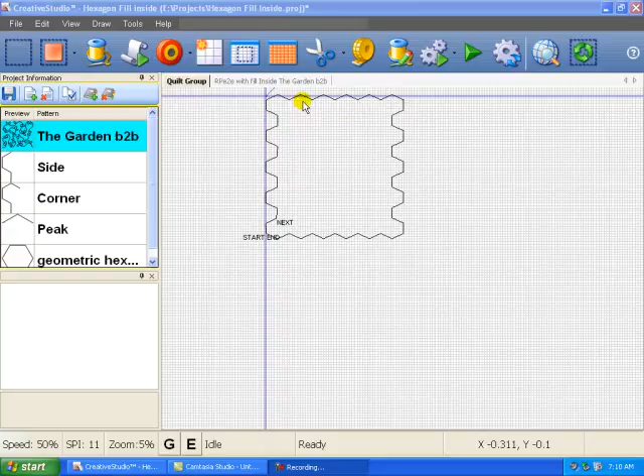So I decided I wanted to use an edge-to-edge pattern, but I wanted to be able to use fill inside, so I would not have tie-offs from using the trim. So this is the basic shape of this quilt. Now I used the geometric hexagon, and I took it all apart using divide pattern so I could use different sections to make this outline. I did this in SAM, and then I saved the project and brought it to the Statler, and I've actually stitched out part of this outline.

In this quilt group, repeat patterns edge to edge with fill inside, and this is the garden pattern, border to border by Anne Bright. So I like this pattern, and I'm going to quilt it on this quilt using fill inside on the edges. First thing I'm going to do is set up the pattern on the quilt.

So I go to repeat patterns, click on it, you can see all the height of this pattern is 12.12, the width is 14. Now all I need to do is put in the width of the quilt in this area and the length of the quilt in this area.

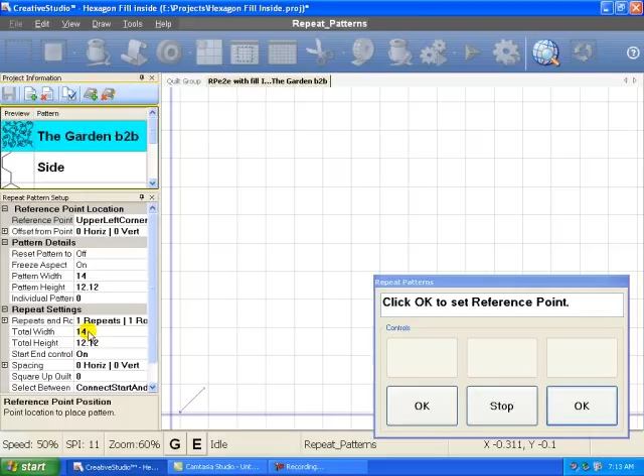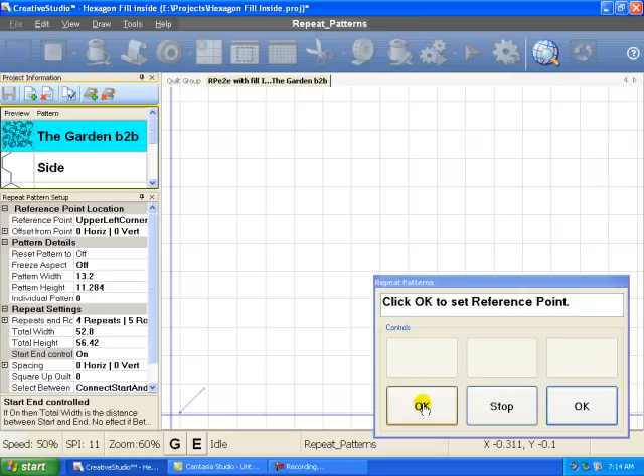The way I have this set up, the width is 52.8, and the length is 56.42. Okay, I got all the numbers in.

I clicked OK. Now the problem is this would just go from edge to edge, and I suppose that would be okay. I used the crosshairs on the left and on the right to check how this quilt was going to fit, and it looks like it's going to fit okay.

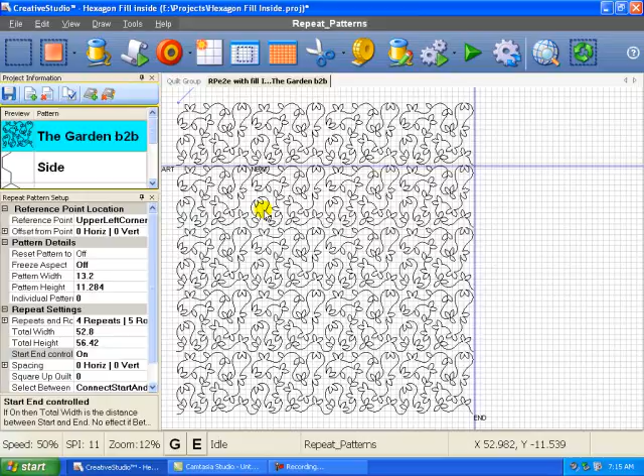But now remember, the sides are irregular, so I have to do something. I have the boundary clicked in, and it doesn't matter that this boundary comes down into the second row, because I'm only going to do fill on this first row.

So I'll select all the repeats in the first row. All the repeats in the first row are selected. Now I'll right click and go down and select fill inside.

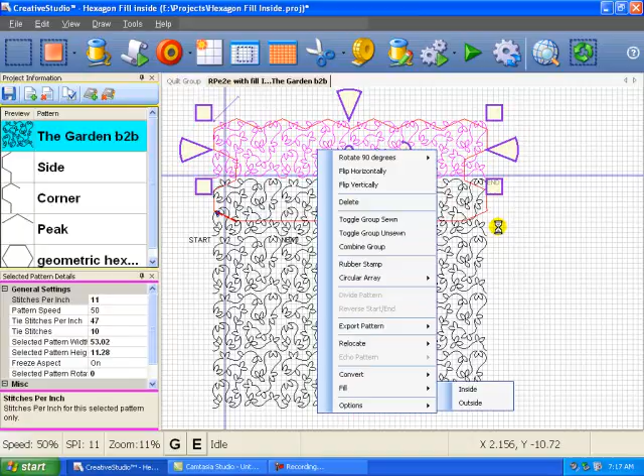Okay, Creative Studio has finished figuring all of these points, and it has trimmed off using inside fill all of these points that would be outside the edge of the quilt.

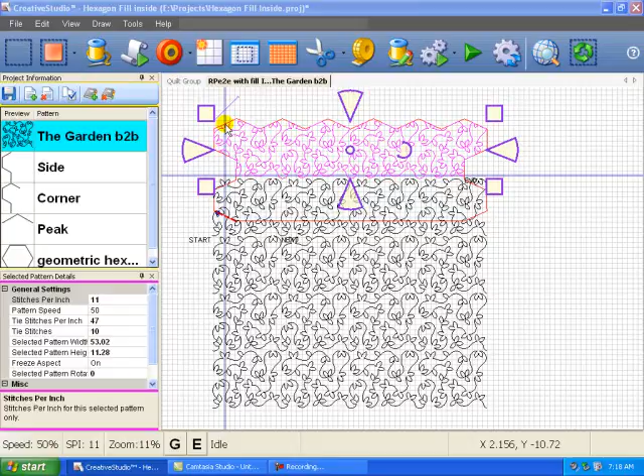Now I like this because this is going to start on this side, and it'll quilt. When it gets to the edge, it'll quilt along the boundary to the next point, and it'll continue to do that all the way up and across the top and down this side until it's finished with the row, and it will do tie off. One tie at the beginning, one tie at the end.

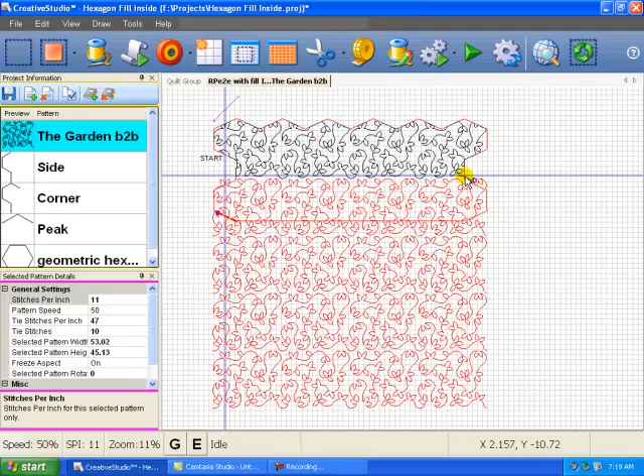I've toggled all the other rows as sewn just so that we can see where the start of this is. You can see it's going to start here, and the end of this row is here. Now I've toggled all those rows back as unsewn, and you can see it starts here, and we looked at the end of this row was here.

Then the start point of the next row is over here, but that's going to be off the edge of the quilt, so I'll have to, when I quilt this first row, I'll roll it, I'll make a new boundary outlining the area, and I'll do an inside fill and quilt the next row.

After I quilt row 1, you say, okay, how are you going to locate this project again? Because your original start point is gone and you can't reach this start point.

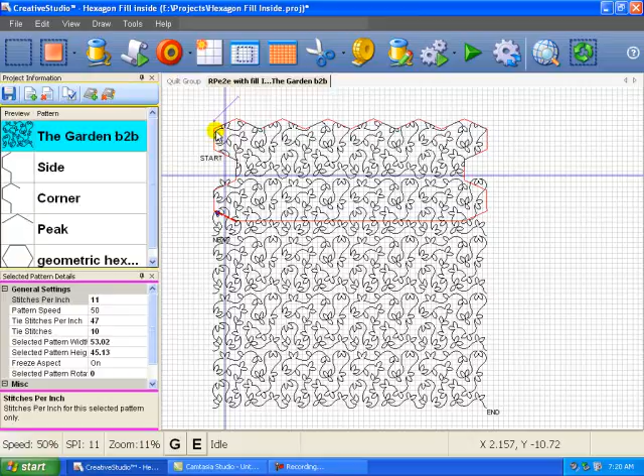I have quilted this row, rolled the quilt, and then I want to relocate. So how am I going to do that? Notice that along the bottom,

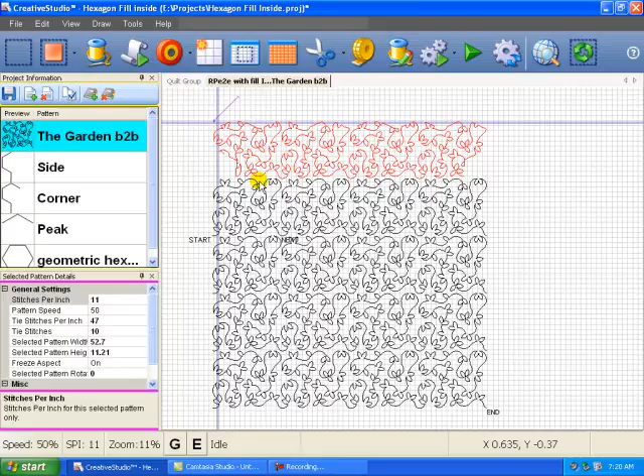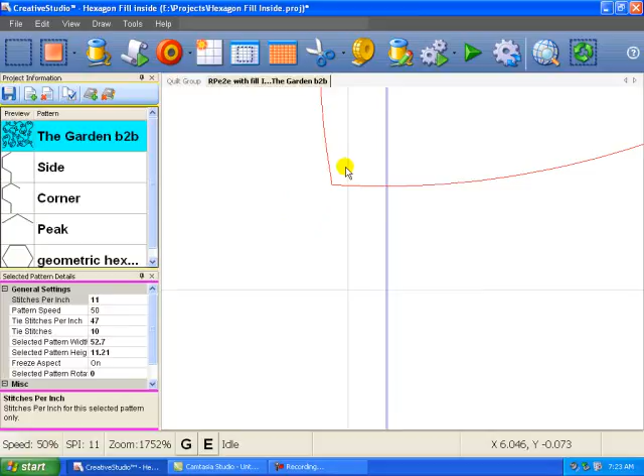this pattern has many points. I have rolled the quilt, and this point is way up next to the take-up roller. I zoom in, I right click, select relocate, shift all to one point, follow the instructions, says click on a known point on the CAD screen. This is my point. I click it.

Then it tells me to move the machine head to that point. I've done that. Click yes. Now it has relocated the entire quilt project around that one point. Now this is up next to the take-up roller.

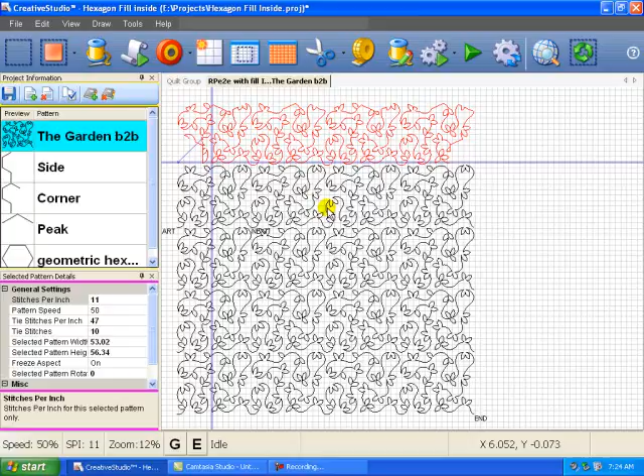So next thing I'll do is do another boundary, and then select the second row and do the inside fill, and I will continue to do that, and I will continue to use a sharp point

like right here, the point of this leaf. I'll continue to quilt and roll and use relocate, shift all to one point, make my boundary, use fill inside, and each row will have a tie at the beginning and a tie at the end.

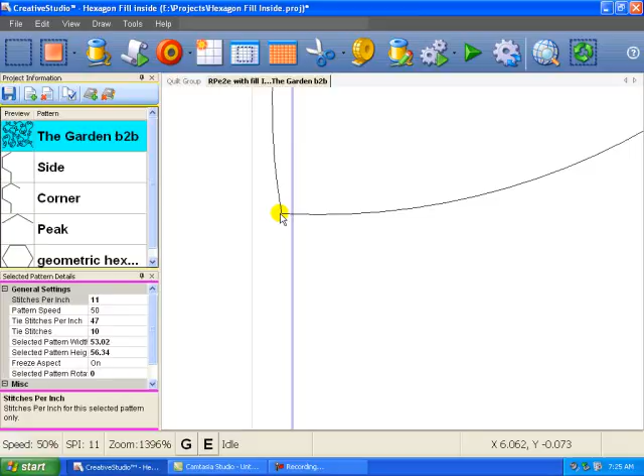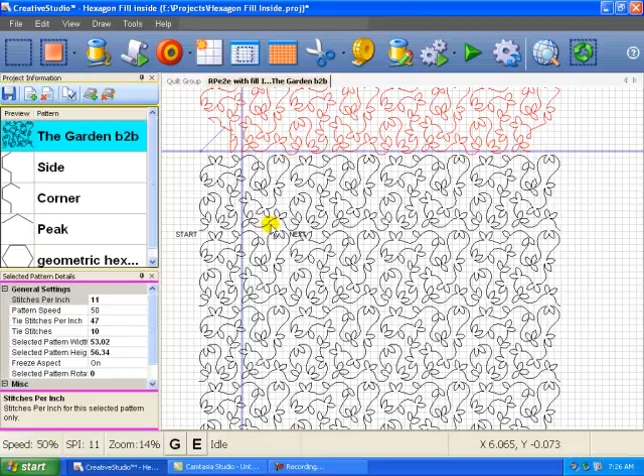Using fill inside for edge to edge work is not that difficult, but it does take a little bit of practice to get to know where do you relocate, what kind of point to use. And I like this because it doesn't matter where the start and end point of the pattern